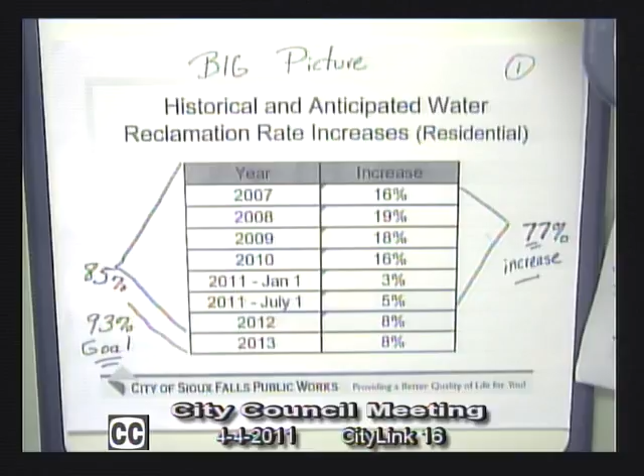I would urge the people at home, call the water department and get a copy of your bill. Last Friday, I got a copy of 3 different families' water bills. I teach piano, and I asked if I could get them, and they said yes, they all have children. I got a copy of their history from 2007 until today. I also got my own history - I'm single, so I don't use a whole lot of water. But so I got this, and it was very interesting. Would you go to the next slide?

The Booman family, they have 2 adults, 2 elementary children, and 2 small children, so they're not using as much water as high school kids would use - their kids take a bath less frequently, those little ones. But as of February 5th, they used 7 consumptions of water, and their bill was $44.27. So it's more than what Mr. Cotter had up there. Back to 2007, they paid $26 for their water bill. So they're paying $18 more per month, which comes out to a $216 a year increase above what they're paying ordinarily. And that's the low estimate - that's the winter usage.

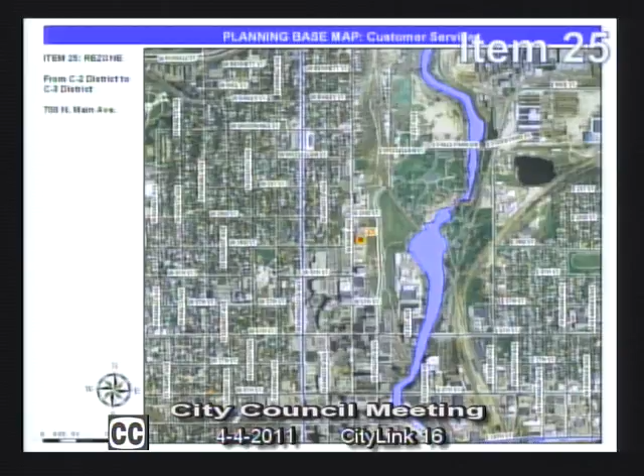Planning Commission recommends approval. Good evening, Mike Cooper, representing Planning and Building Services. We have a petition tonight from the Ransom Church. They are proposing to occupy a vacant building within the downtown area, formerly occupied by Crescent Electric. The building sits on the east side of North Main Avenue and north of the 3rd Street right-of-way.

This is within the identified boundaries of our downtown area. They are proposing to rezone this from a C2 general commercial zoning district to the C3 central business zoning district. As I said, this is within our downtown defined boundary, and the Planning Commission has recommended approval of this rezoning request because we feel it is an appropriate change.

One of the comments made at first reading and at the Planning Commission meeting is that with a church in the downtown district, there are no off-street parking requirements. The philosophy behind that is that church services are typically held on weekends or in evenings, and there's usually an abundance of parking nearby within the downtown area, either on the streets or on adjacent parking lots. Our zoning ordinance has never required parking for downtown churches. But we did ask the petitioner to be here tonight to give you, the councilors, a little more explanation of what they plan to do with the building and for parking during the use of this facility.

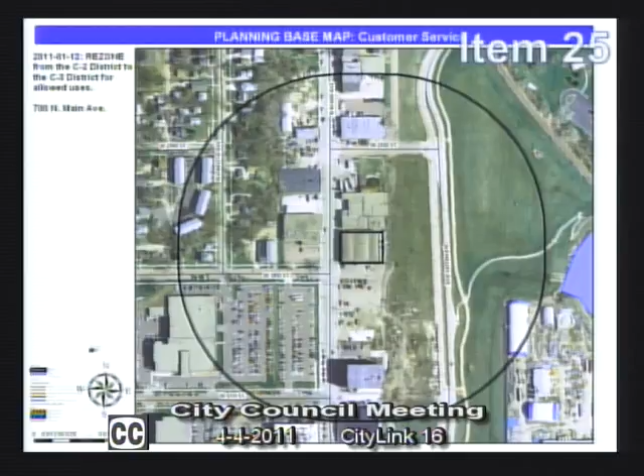Move to approve, by Councilor Brown, seconded by Councilor Rolfing. Any further discussion? A roll call vote, please. Council members: Entenman, yes; Erpenbach, yes; Jamison, yes; Rolfing, yes; Aguilar, yes; Anderson, yes; Brown, yes. That passes 7-0.

Item 26. Second reading, an ordinance of the City of Sioux Falls, South Dakota, a major amendment, petition number 2011-0111 to Chapter 15.45.070, Plan Development Districts at 3400 West 69th Street, amending the 69th and Louise Plan Development District sub-area regulations. The Planning Commission recommends approval.

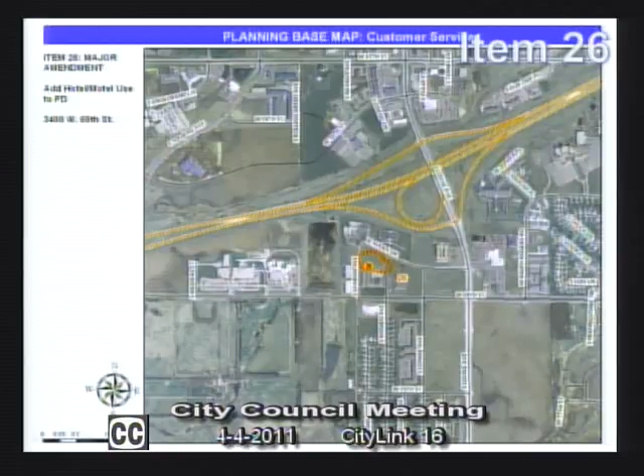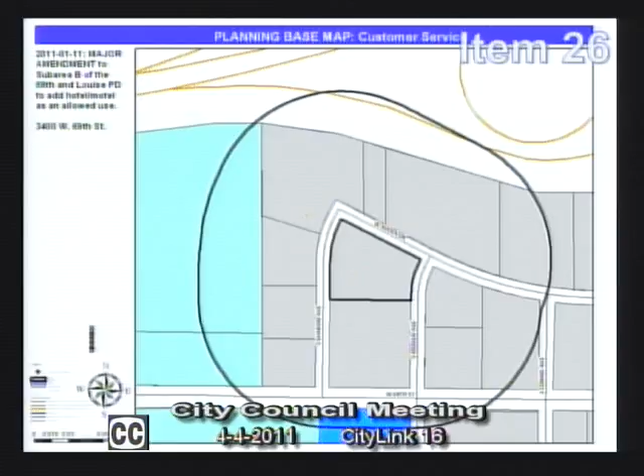This is a parcel of land approximately 3 acres in size, currently vacant, located west of Louise Avenue and north of 69th Street along Avera Drive. The petitioner is Lee Howell with Howell Hospitality Incorporated, proposing to add hotel and motel to the permitted uses within this planned development zoning district. The preliminary information suggests this is proposed to be a future Holiday Inn Express, and although we don't have final building plans, it's approximately 88 rooms, though that could change.

They believe there's a good market for this use because of proximity to the interstate, as well as the medical facilities and other development in the area that would generate demand for this type of land use. The Planning Commission is recommending approval of this amendment to the zoning ordinance.

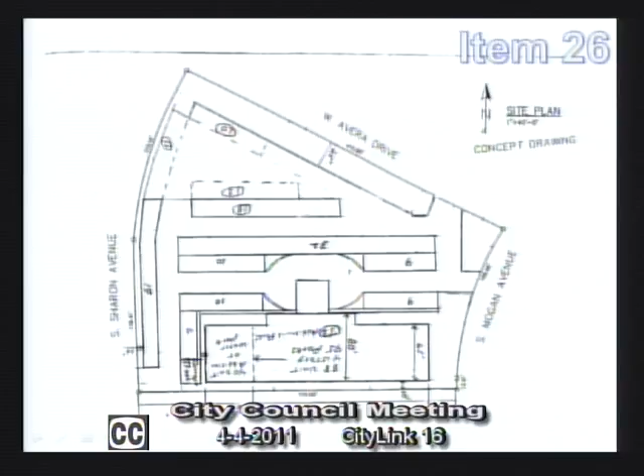Mr. Cooper, would Mr. Howell like to speak to this? Do you want to say anything? I think only if you have questions, maybe. Very good. Is there anyone in the audience who'd like to speak to this item?

Councilor Rolfing: Thank you. Mike, what else under this zoning regulation could go in there besides the hotel? Staff: Well, under the current zoning, it allows offices, retail, trade when in conjunction with wholesaling or manufacturing, warehousing, indoor recreational facilities, public utility facilities. Those are the main uses in the area, primarily developed as office and some retail.

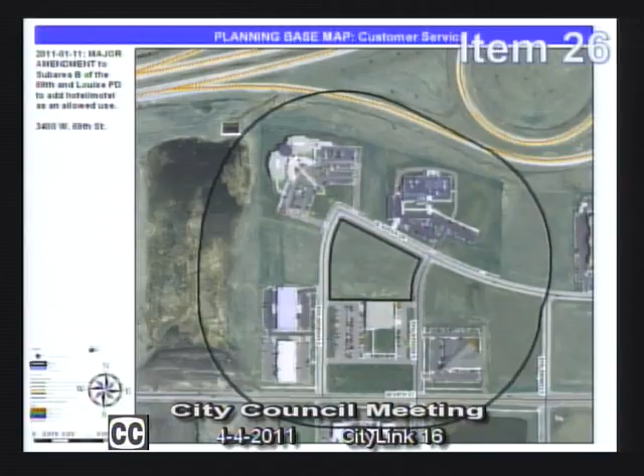Okay, and now with this change, it would go to what? We would be adding, within the list of permitted uses, hotel and motel. If this would fall through, could they change it to any one of those things then? They could change it to anything currently listed within that zoning district. Would they come back before this board, though? Yes. Okay, thank you.

Hearing no further questions or comments, a roll call vote, please. Council members: Entenman, yes. Erpenbach, yes. Jamison, yes. Rolfing, yes. Aguilar, yes. Anderson, yes. Brown, yes. Thank you, that is passed 7-0.

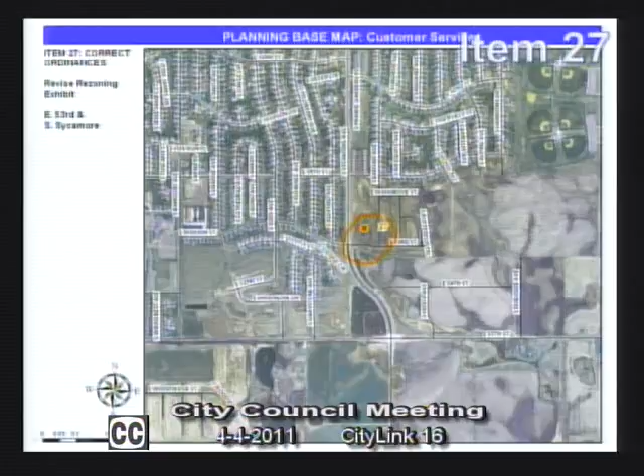Mr. Cooper, thank you. Is there anyone in the audience who'd like to speak to item 27? City Council, would anybody like to make a motion? Move approval, Erpenbach. Second, Rolfing. Councilor Erpenbach made a motion to approve item 27, seconded by Councilor Rolfing. Any further discussion? A roll call vote, please.

Council members: Entenman, yes. Erpenbach, yes. Jamison, yes. Rolfing, yes. Aguilar, yes. Anderson, yes. Brown, yes. Thank you, that is passed 7-0. Item 28.

Second reading, an ordinance of the City of Sioux Falls, South Dakota, amending the revised ordinances of the city by revising public hearing standards and fees. The Planning Commission recommends approval. Last year, the planning staff was asked by members of the council to take a look at our notification process for items that go to either the Planning Commission or City Council involving land use proposals. Jeff Schmidt, who is in the audience, helped put together a task force, a study committee of representatives of the community including citizens, representatives of development, home builders, and others, to look at options for consideration.

We've gone through a review with the Land Use Committee. We've talked a lot about the type of signs, the size of signs, where they should be posted and how long, and other ways of notification, including requirements for neighborhood meetings. After a lot of review and recommendation, tonight what's being proposed to the City Council would be a three-part modification to our current public notice process.

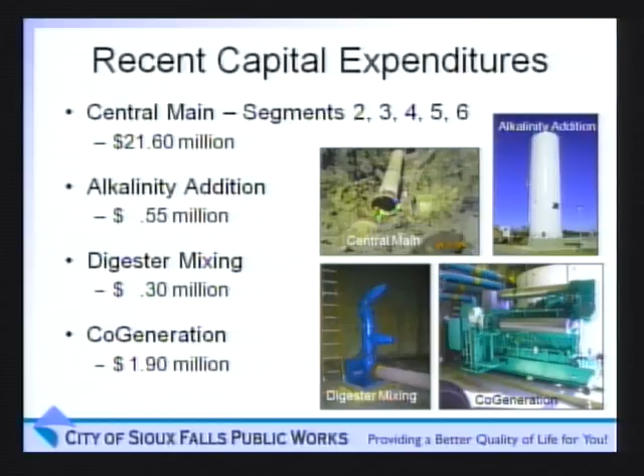The other future project we're looking at is Sioux River South. If we go a couple of slides forward, Sioux River South is a smaller trunk line sewer to the Central Main sewer, and it takes the wastewater up from a portion of the southwest part of town and most of the south portion of town. This is the trunk line that serves the Tuthill lift station. If you look at the graphic, the Tuthill lift station is on the right. This is now 42-inch reinforced concrete pipe, and it will be upsized to 54-inch fiberglass pipe.

As you move to the left of the graphic, there's a red line, a sewer line that goes north up to 41st Street along Duluth Avenue. That line is actually one we're upsizing, taking some flow that would normally have gone east through the Pam Road area and moving it down south into the larger pipe. Our flow modelers tell us that should provide some relief for the people on Pam Road and not send as much flow down that pipe.

It's kind of a condensed version of what we talked about this afternoon, and I'd like to turn it over to Steve to talk about the recommended rate increases. Thank you.

Mayor Hewitt, members of the City Council, my name is Steve Burrian. I'm with AE2S, an engineering consultant who has been doing your water reclamation rate utility work. I have the bulk of the slides this afternoon, so I'll do my best to winnow that down to something skinnier.

I am here this evening on behalf of the staff and the engineering consultant to recommend two increases: one, a mid-year increase for the water reclamation utility on July 1st, 2011 of 5%, and a second one, which is the more customary one, on January 1st, 2012 of 8%.

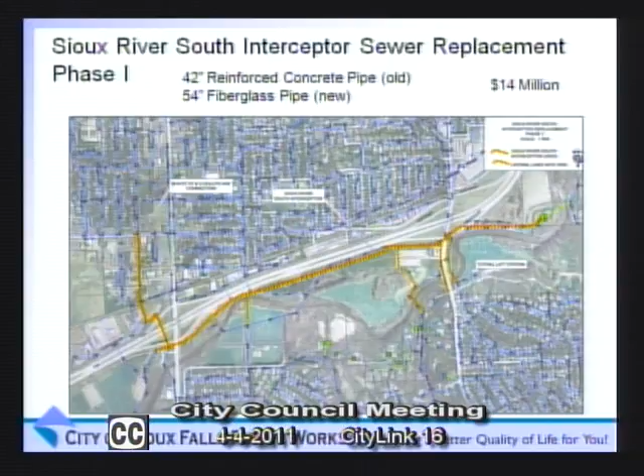Mark, our system is set up today, as you said, you pay for what you use, right? First of all, thank you for clarifying that it was sewer only. There were some misconceptions at the beginning of the meeting, and I don't want that to go out to the public that this is sewer rates only.

But I also want to be clear, and Mark Cotter will never say this, but when he took over, those utilities were in serious financial straits. Had he not recommended those increases, today taxpayers would be subsidizing that water and sewer. That means you would not only be paying for what you use, but when your neighbor's wasting water or wasting sewer, putting more down the drain, you'd be paying for that too. It was irresponsible for our predecessors not to look at this on an annual basis and raise those rates for the cost of service and to invest in the future projects this city needed.

So to say that this council just willingly raises these rates is not true. If it was up to us, every single one of us would probably vote to keep these the way they are. It's not an easy vote, but Mark Cotter has done what has needed to be done to make sure that this will serve us today and tomorrow and down the road.

Councilor Rolfing: I would also add to that, we were the ones after the August debacle with our sewer line that asked you to put a plan together so that this will hopefully never happen again. And this is part of that plan, and you did a great job of putting that together. So I thank you for that.

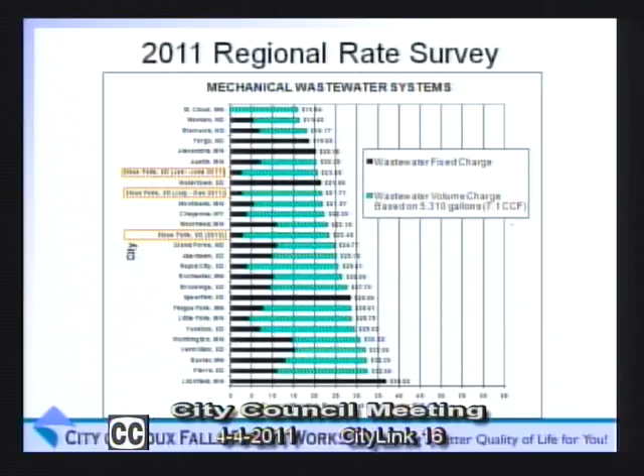Yeah, there are some in there that are fees only. They just charge everybody the same rate, regardless of whether you have fixed charges, regardless of how much water they use or how much sewer they discharge. Some of them are on kind of a fee based on what you use. And Sioux Falls has chosen to go with the volume that you discharge or that you use, both on water and sewer, thinking that was the fairest way to go.

If I choose to have my lawn looking nice, I get to pay for that. If I choose to let it go brown and flush the toilet every other time, I get to live with that also, right? That's right.

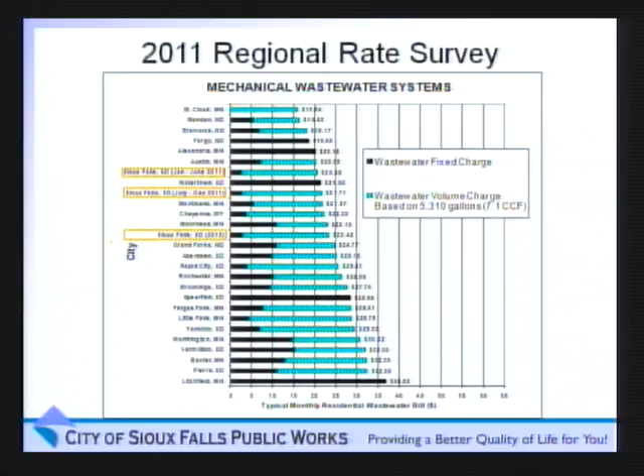Councilor Entenman: Mark, I got a question for you too. Any good business always looks at the future and what circumstances or situations might pop up, and we all look at reserves. You mentioned reserves, and it was mentioned by a couple of the other folks out here too. Best practices, can you tell me, when you look at your reserves, what kind of percentage do you look at carrying for reserves? And the second part of the question might be, when you look at those reserves, what are they actually used for when you plan into the future?

Okay, we do have a slide on reserves. Well, first and foremost, probably the most recent use of reserves is when the sewer collapsed. We did not have an issue with cash. We immediately called the bypass company, we called the contractors, and immediately went into that mode of let's fix this situation as quickly as possible.

We also understand that when you run a business of this size, you need to have dollars in the bank to actually cash flow your operation. But at the end of the year, we'd like to have, for the operating side, 90 days set aside, which is basically $2 million. Throughout the year, that will increase, and it'll also ebb and flow, and it will decrease. But that's been our benchmark of how we cash flow projects, how we cash flow the operations, salaries, chemicals. We need to make sure we have that, because you don't get all of your ratepayers to pay in on day one. We collect revenue throughout all 12 months of the year.

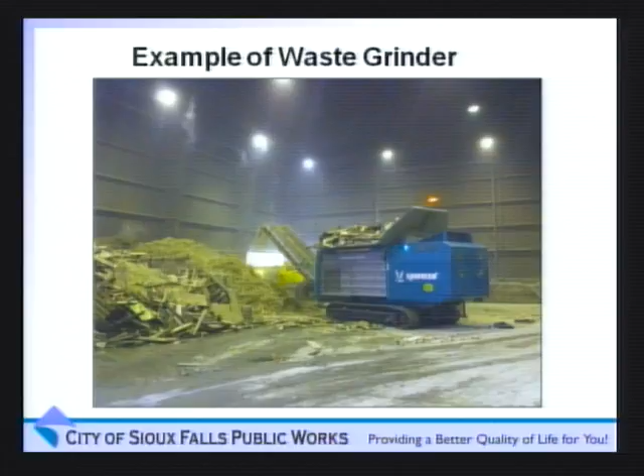I've been looking at this for a couple of years, so I'm excited it's maybe finally coming to fruition. Back in March of 2009, we did a demonstration at the landfill — that top picture shows the setup down in cell 1 of our landfill — and we got approximately 30 to 50% volume reduction.

What that basically means is you take large, bulky materials, chop them up, and you're able to put them into a much smaller area. It's similar to a jar full of rocks versus a jar full of sand. These are low speed, high torque pieces of equipment — pretty efficient, about a 10 to 12 gallon per hour fuel burn.

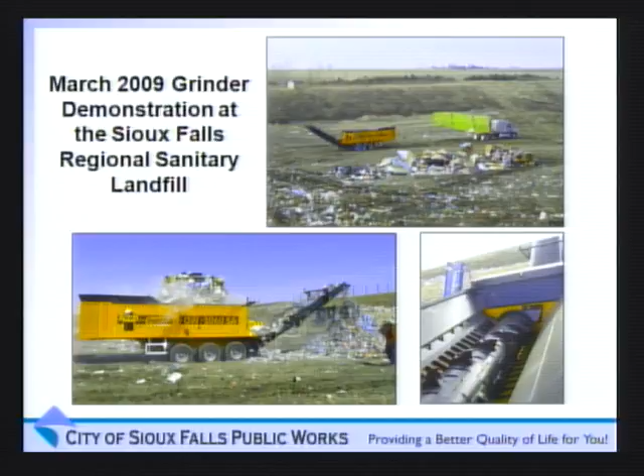As part of the C&D feasibility study, we toured construction and demolition material recovery facilities in Wisconsin, Iowa, and Minnesota. These pictures show the wood grinding operation in the top left. Top right is a sorting facility where they take different types or sizes of materials to different conveyor systems. Bottom left is a close-up of the wood. One thing you'll notice is that little bin in the middle at the bottom — that's a metal bin. There's a cross-belt magnet you can put on these machines to recover metals and sell that for scrap metal value.

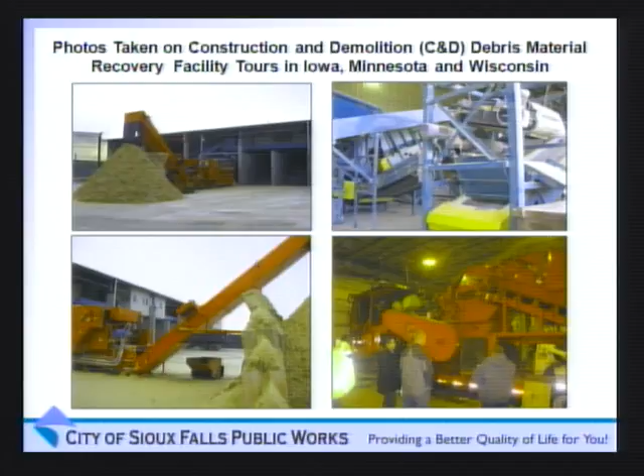This is a picture of basically a sort line, a sort and pick line, where you put the material on a conveyor. It gets conveyored up to this sort line. People would be separating out wood, cardboard, plastic, metals, and drywall. And basically, we're able to beneficially reuse or recycle that material as opposed to just landfilling it.

And then at the end of that process, you could grind the wood for a fuel. You could also grind the residuals, the stuff that you cannot recycle and have to be buried anyway, to get that volume reduction like we talked about.

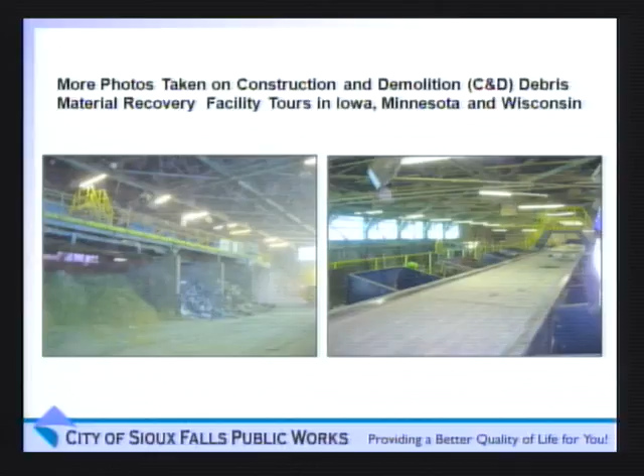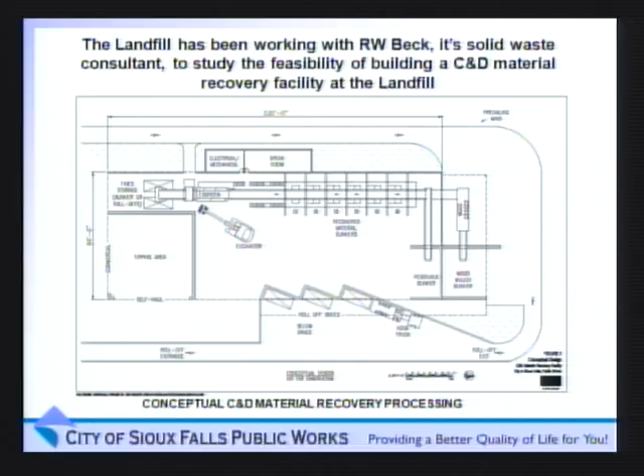Because we have this unique public-private partnership with POET already, we're already sending renewable fuel, landfill gas, to the Chancellor ethanol facility. POET approached us with a unique proposal to store and grind the corn cob stover at our landfill. This is corn stover that they intend on using at their cellulosic facility that they're building in Emmetsburg, Iowa. And that facility won't be up and running for a couple of years.

So it's a short-term need. We fill a short-term need for POET, and we basically have a long-term need for the grinder.

So we would grind the wood waste at the Sioux Falls landfill. We'd also grind very small amounts of wood waste, but the main thing we'd be grinding would be the corn cob stover that would be hauled in. POET's responsible for all the transportation. We are basically responsible to grind the material, load it, and unload the corn cob stover.

The proposed agreement term, there's 3 different contracts, and we're looking at an agreement term of April 1st, 2011 to April 30th of 2013. We're estimating that this will allow us to generate $441,500 in an alternative revenue funding source, with an estimated purchase price of the grinder of $565,000.

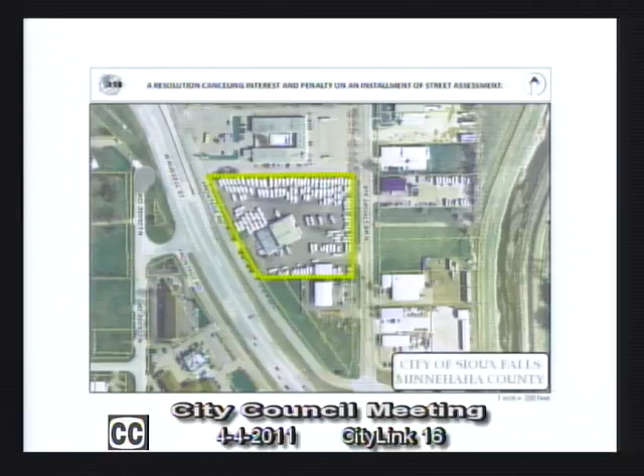At the urging of Councilor Erpenbach, this resolution was drafted for the council's consideration. All it does is cancel the interest in light of the problems that had transpired. It does not change the actual installments. The property owner has been kept apprised of the situation, and I understand she may be here tonight also if you have any questions.

Mr. Pfeiffer, thank you. And City Council, I apologize, I made a mistake. We should have read number 36 into the record before Mr. Pfeiffer spoke. Would you please read it? A resolution canceling interest and penalty on an installment of street assessment.

Mr. Pfeiffer, thanks for the great summary. I appreciate that. Is there anyone in the audience who'd like to speak to this item number 36?

Very good. Councilor Erpenbach, did you have any further comments? I have spoken with each of the council members about this. It is one of those cases where a citizen was doing her best to advocate for her property, and there were issues. The city's work did cause some damage to her property, and she was waiting for that to be fixed.

She believed it was the right thing to do, to hold that check. She didn't realize, and I might say, we didn't make it clear that there is a warranty on all those projects. And so I would encourage citizens in the future to make sure that they kind of advocate for themselves in that way. But this is one of those goodwill gestures that we all kind of goofed up on, and we're just asking that interest be waived.

Councilor Erpenbach, thank you very much for your efforts on this. Would you like to make a motion on this? I would love to make a motion on approval of item 36, please. Thank you. Second, Aguilar. Councilor Erpenbach's made a motion to approve number 36, and it was seconded by Councilor Aguilar.